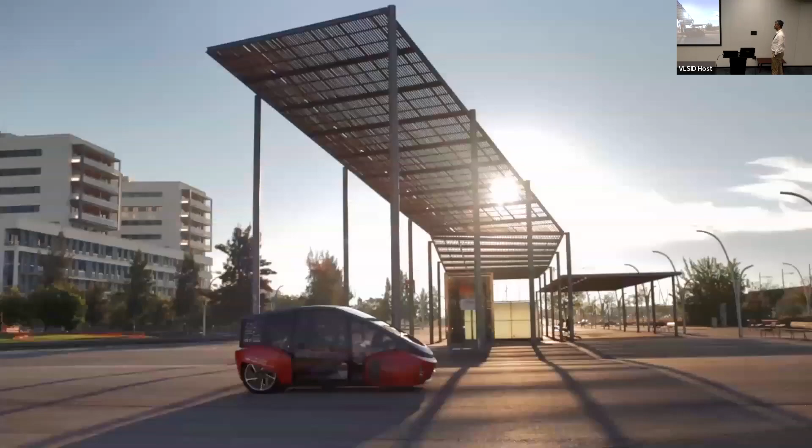So next 60, 70, 80 minutes, I'll try to introduce you to all the innovations happening around this whole autonomous vehicle and mobility era, and then Costas will deep dive into the radar part of it. Okay, so let's move forward.

I was strictly told by the technical program team of the conference that no marketing pitch, but I was strictly told by my corporates to brand NXP. Okay, great. So I'll take a midway. We'll quickly introduce a few thoughts about NXP.

1800s. Yes, 1886, if I'm not wrong. That's when this was patented, and this three-wheeler car went on a public drive. And here we are, 135, 136 years later. That's how the future cars are looking. I think you are trying to look for that big engine that is shrinking day by day. So as our technology is shrinking, so do our engines. And I'll show you this picture again towards the end of our discussion today.

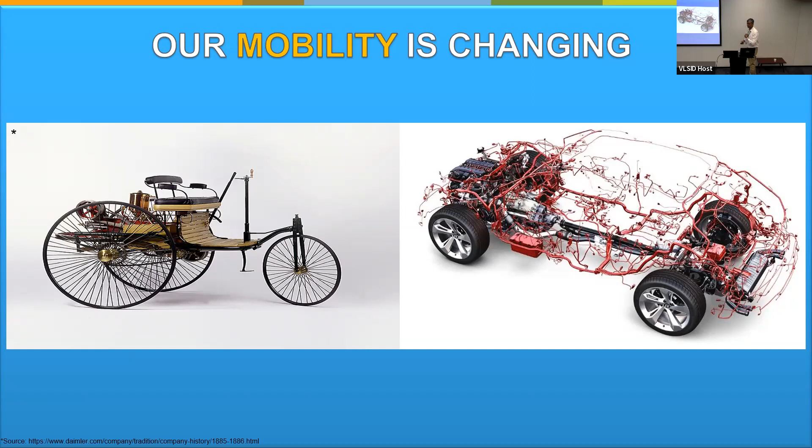And what is making this shift in automotive mobility? There are a lot of things here. I don't want to read through all of them, but have a look at the bottom here. The average vehicle today has about 1,000 semiconductors sitting inside it, and a bill of material of about $640. It's not that all 640 comes to NXP; it's shared by all of our ecosystem partners. But see the picture below: by 2030, which is just a couple of years ahead, we'll have about 1,200 semiconductors coming in, and about $1,000 per car is going to be spent only on semiconductors.

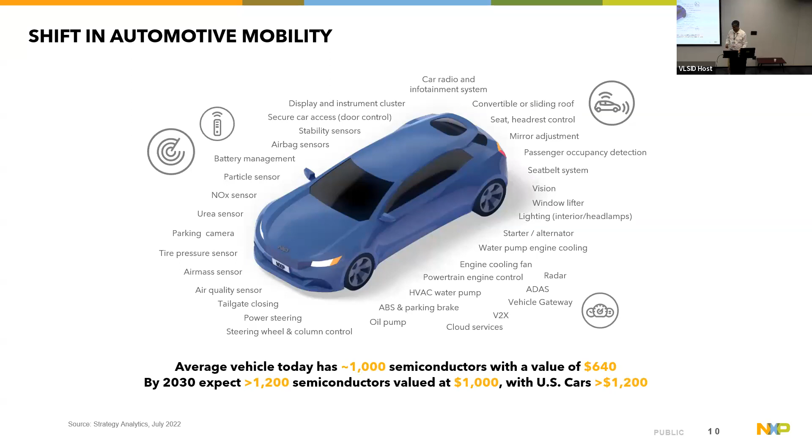And if we talk about the US scenario in particular, this number goes to 1,200 because the safety and security regulations are more, because in India everything goes. We manage things. We wait for that car accident to happen on the Mumbai-Pune highway to make the rear seat belt compulsory for us. But typically, this shows the level of semicon which gets into a typical car today, and that's why we'll focus from a business perspective on automotive.

Let's see the global mega trends in automotive. I have categorized them majorly in three parts. I'm sure there are 10 or 15 or 20 other aspects, but we are going to talk about these three in today's talk. We'll focus on autonomous, zero road accidents. 90% of accidents are due to human errors. Electrification: we really want to be zero emission.

Increasing global regulations. There are a lot of talks already being done across the globe on how to be carbon neutral by which year, and across India we even pledged some numbers. But how do we get that electrification? Because only the moment you take this whole carbon out can you reach these carbon zero numbers. The third thing we are going to focus on is connectivity. Zero time wasted. Intelligent transport systems, new opportunities for infotainment, powertrain, and whatnot. And within that connectivity, I'll leave the radar part to be covered by Costas.

Okay, so with this, let's focus on autonomy. And many of these things we discuss are not only applicable to a car. It could be autonomy for a robot. It could be autonomy of something you see day to day in your life, at your home or at your office or while you commute.

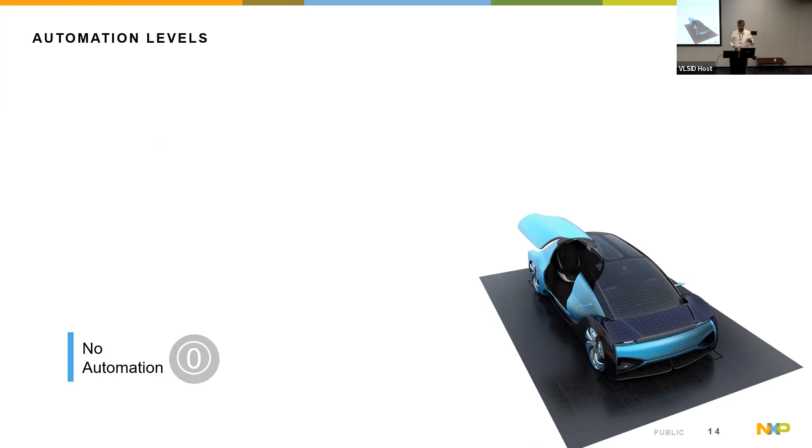So first is no automation: all mechanical, all done by a human, a smart fellow like you or me driving it. Excuse me. Thank you.

Next comes driver assisted. So there's an assistance system in place where longitudinal and lateral distances are assisted by that particular system for the driver. The next level is partial automation, where your automobile can get into autonomous mode, but if required, there is still a human sitting inside the car who can take control. So it's like the cruise modes we typically see in many of our vehicles these days in India.

Conditional is something wherein there's still a human sitting inside the car. The car is able to run on its own. But if there is a scenario being created which we assume is difficult to tackle in the given situation, it gives enough time for human intervention, the human sitting in the car, to take control of this and move forward.

Sorry for being ignorant about that side. Okay, I'm asked to stand here. I don't know who's watching on Zoom. I'm not that smart to be recorded. That's fine. You'll record audio.

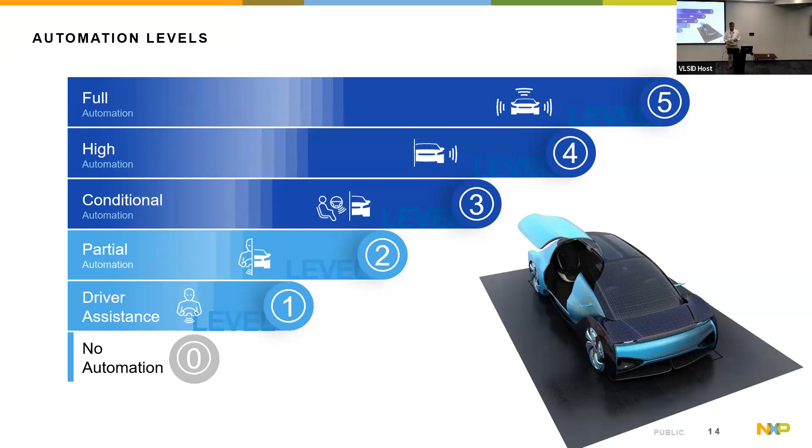Okay, no. So what I was trying to make out is, I feel there would probably be a McDonald's or KFC inside your car, because no one is going to drive. It's a way to commute. You go and buy things, and that's how they'll make money for all the battery or charging they are doing for the car. So that's how I see full automation changing our mobility once we have it on the roads. So levels 0 to 2 are human drivers; at levels 3 to 5 the automated driving system performs the entire dynamic driving task and monitors the whole environment.

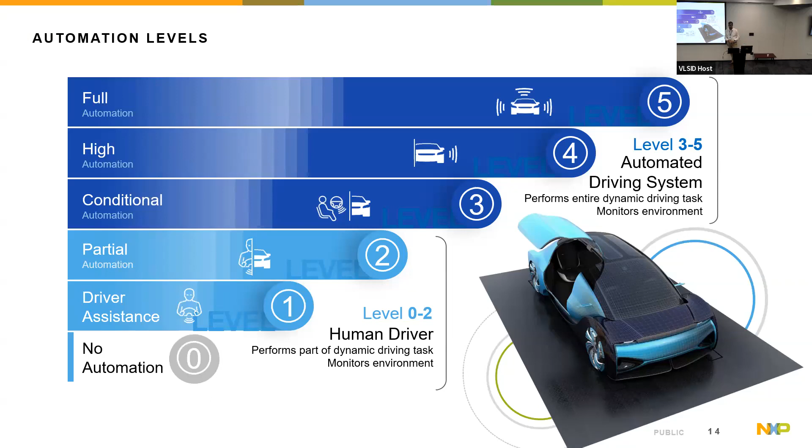I'll just touch upon the modeling and planning part of this automation, though there are n number of other concepts involved. Just want to give you a little glimpse. So modeling is something which gets monitored and modeled, and a mix of sensors and telematics takes care of this modeling part. There's a fusion architecture. There's not a single recipe. It's a sandwich architecture which we typically use in any of these modeling parts. Interoperability, or heterogeneous solutions.

Let's talk about one more typical Indian scenario. There's a big poly bag in the air. Now this autonomous vehicle needs to identify whether there's a human or not. If I hit that particular object, is that going to harm the car or the passenger sitting inside it, or it could be a bird. Okay, so we need to really understand, make the coordinates and see what it is and what it is not. Is there life or no life in that particular object.

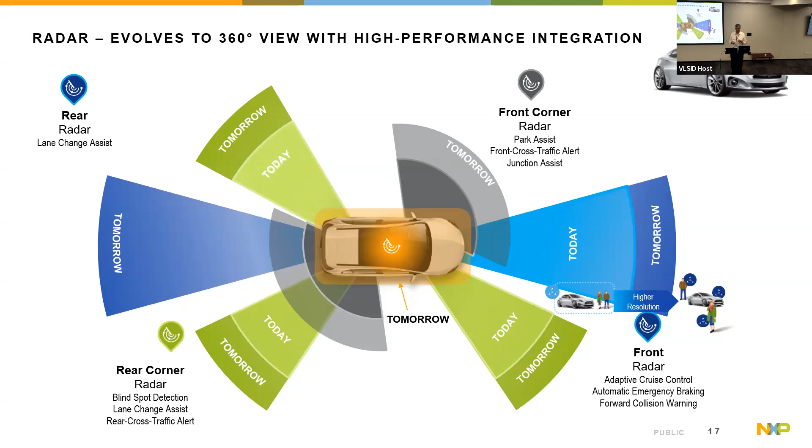With all these views, at every single roll of the wheel, you need to analyze your situation, what's happening or what could happen. As I was trying to explain to Costas, in India the bigger vehicle takes precedence. If a pedestrian is on the road and there's a bike coming in, the bike takes precedence. If there's a car coming up, the car takes precedence over the bike, and if there's a big tanker coming in, he's the king. So an autonomous vehicle needs to understand the shape of the vehicle coming in, and how to take the right decision at the right time. Quickly about vision.

This picture is trying to show a few of the views. If you see this particular car, it's not just focusing on the front view. If there are two vehicles adjacent to each other, you need to know what is on my left, at what speed it is coming, at what angle this guy is trying to tilt.

There are different driver monitors and perceptions we create, and this is how the whole automation thought process of decision making happens. We need to create a perception: I'm moving here, there's something on my left, there are two vehicles, some pedestrians going in and out. We need to see exactly where the object is, at what angle it's moving, and at what speed. If it keeps moving with the same angle, speed, and direction, will our vehicle collide with this other object or human or not.

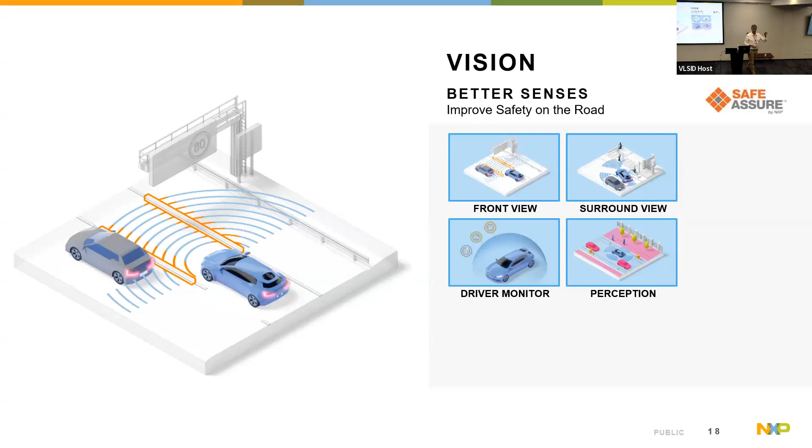And this all has to be done in real time. We don't get 3 hours to attempt the question, you need to take a decision.

Reasoning for today and tomorrow, there are many things which come into play, like surround view and vision for 3D segmentation, and we really want to keep extending it today, tomorrow, and probably in future we'll have a slide for a day after tomorrow, a week later, a month later, a year later, what all we can do. Certainly nobody today knows what we are going to do as an organization 10 years down the line.

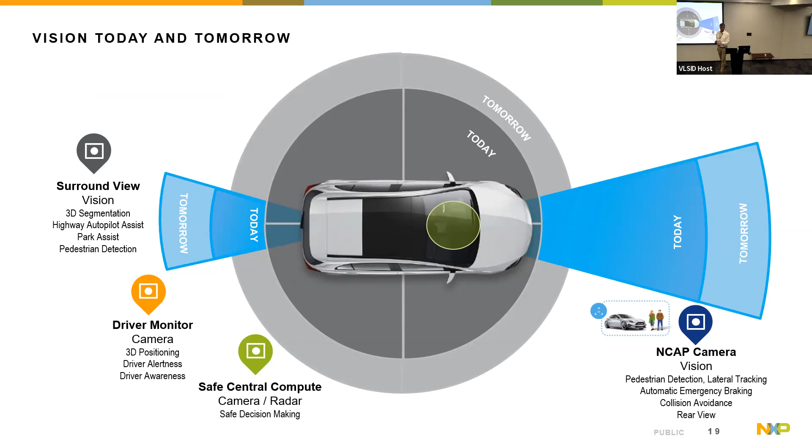Thanks for the question. Cameras and radar both, right? Why not just cameras? This is a really good question. So it's not only camera, it's not only radar, it's not only lidar. It is a mix of all.

Let's assume, so different solutions work for different segments, and different suppliers have different roles. Let me try to make you understand. We as NXP are doing something which is inside a tiny chip. We design the chip, and we have our own fabs to manufacture them, or we have partners who manufacture it.

Now this particular chip is sent to the next level of OEM, the original equipment manufacturer. This OEM could be, with all due respect to all the OEMs we work for, I'll give you a couple of names, though that doesn't mean these are the only OEMs we work for or the favorite ones of our organization or mine.

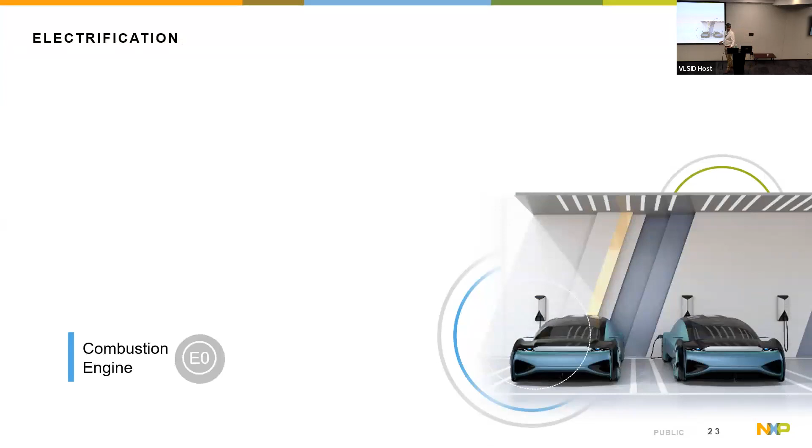But how do we achieve this? Because one of the major means of pollution is our whole mobility. This whole electrification has many segments. I'll start with typical combustion engines, which we have, I call it E0. The next one is mild hybrid. We have a lot of mild hybrid happening in India. Almost every other supplier is having a mild hybrid model these days.

Full hybrid, again, where your combustion engine is still inside your vehicle, but there are other means wherein you need not plug in to charge your batteries, but your battery gets charged with stop-break kind of systems.

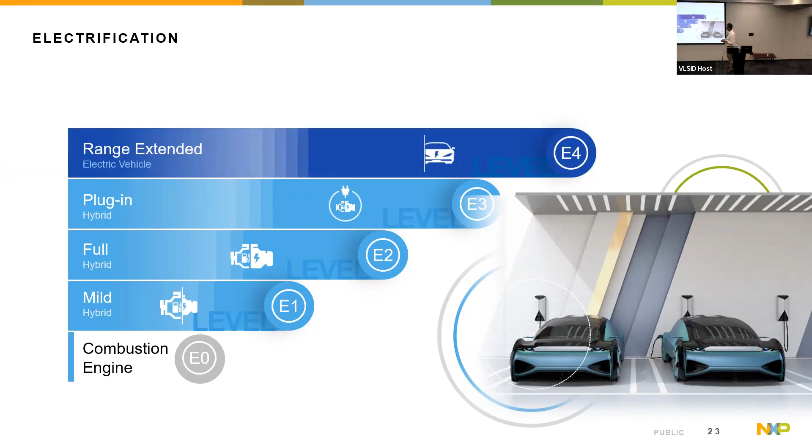E3 is something plug-in, wherein you need to plug in your vehicle to charge it, and you run fast. Range extended, E4 level of electric vehicle, where it's majorly the electric motor which is running all of your show. And the last is the pure electric, where I don't need a combustion engine, whereas combustion engine is already out.

This slide would probably tell you. But pure electric is the one where I say pure green mobility.

But I give this question to all the folks who talk about green mobility. We are solving one problem to create another, because we still don't know, with all the batteries we are trying to manufacture to power all these vehicles, how do we reuse or recycle those batteries? Because there's a famous big landfill next to the exit of the Delhi border, which has been shown in many movies, even Hollywood movies. So we are trying to create another such big, I would say, recycled e-waste generated from batteries.

But certainly carbon footprints are better. But how do we reuse? Because there are many other companies, I was talking to one of the startups recently, they are trying to optimize the battery life. They said, give me a dead battery and I'll still infuse some life in it.

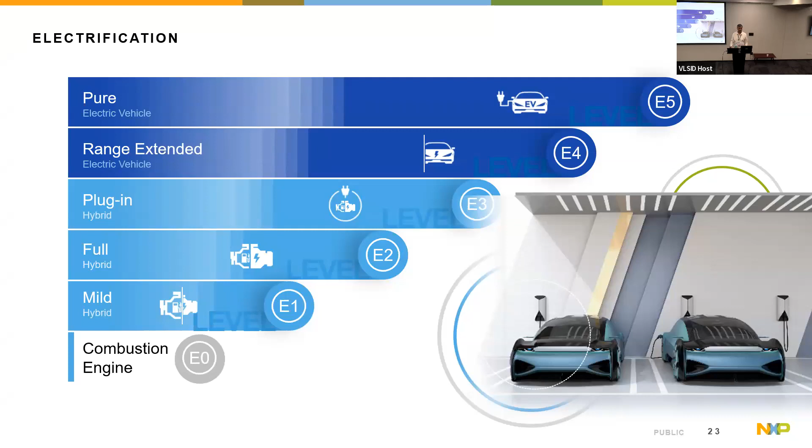So quickly, here are the different levels of electrification. If you see, once you get to this PHEV, we call it, it is something. So how do we say that we're becoming more green with electrification? Because the point is we are charging our batteries only, right?

Still, the power is still coming from some power stations, which may be running on coal. Which may be running on coal. It might not be running on coal. Okay, I'll come to this. Okay, thanks for giving me the answer. Okay, high percentage of certainly.

If you see the combustion engine, certainly the whole lot of pollution which is being generated as compared to electric vehicle is more. But certainly to get that electricity, how do we produce it? Is it coming from a nuclear plant, which is hardly doing any kind of effect over environment typically, or is it coming from a coal-related thing, or through water you're generating electricity, that's a separate part. But as I said, we are solving one problem and creating another, and that's how we keep on evolving.

But the moment you call it green mobility, it is a mobility in which the final product, a car or vehicle, is not polluting your environment. But now you will say that you're generating plastic and metals to manufacture the car, and that's polluting. Certainly, yes. But the end product is not generating pollution for you.

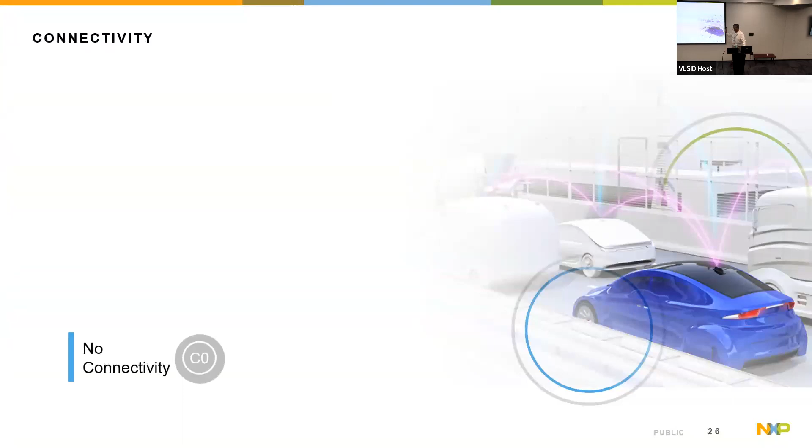Let me jump on connectivity, where I really want to spend a little more time. So like electrification and autonomous, there's a different level of connectivity we call it. First is no connectivity, our typical Fiat car, you have one parked in your Chowmahalla Palace. I went there, so they still had a Fiat there parked in a green color.

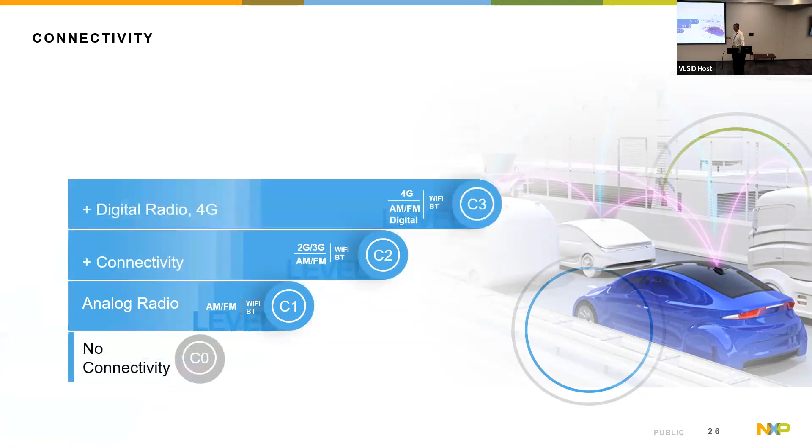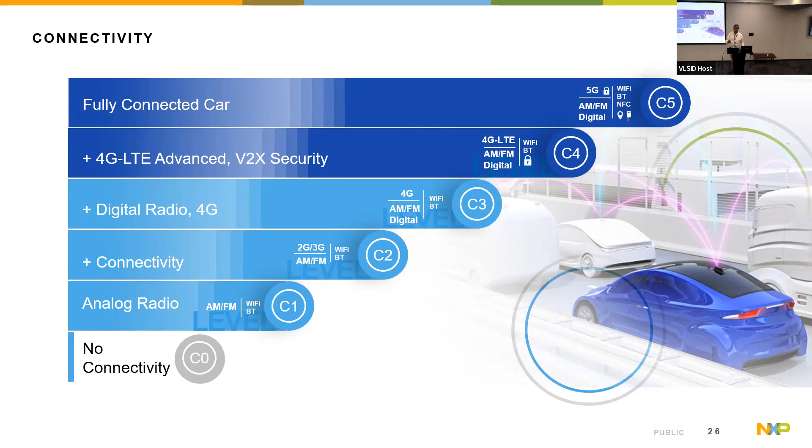And then some analog radio, more connectivity with 2G, 3G, amplitude modulation, frequency modulation. Digital radio, 4G, we already have 5G in India. Then the next level of connectivity with LTE advanced, etc. And finally, a fully connected car, which can talk to different devices or different other infrastructure or different other vehicles. I'll talk about the different connectivities in a few of the next slides.

I'll try to wrap in 10 minutes, and then we'll conclude. We'll spend the next 10 minutes about the future car infrastructure.

So here I just want to give some glimpse about V2X, as she asked. There are many means for this vehicle to interact with infrastructure. Similarly, there are modems - 4G, 5G, and now we're already talking about 6G connectivity. Broadcast reception, analog radio, digital radio, satellite radio, and we're talking software defined radios.

But when we talk about radio, this always reminds me of the example of a Jeep being hacked many years back. How that car was hacked, I'm sure many of you must be knowing, but for the other audience who might not be, this hacker got into the car through a radio channel. Because we never secure our AM, FM radios - there's no banking password residing inside that radio. But through this radio channel, they were able to get control of the whole vehicle.

Similarly, back in 2013, there were many spam mails being generated. One of the agencies took over and said, okay, let's see from where this was getting generated. This was getting generated from a house. So, as we have biased minds, we'll think probably this was happening from some laptop, but that was happening through a refrigerator.

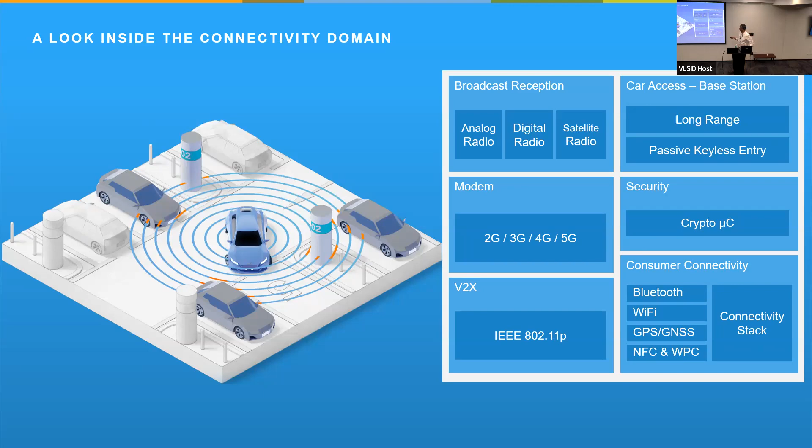I need to run fast to cover those topics. I quickly want to talk about UWB, ultra wideband, getting a lot of traction as an organization. It is accurate positioning of information of objects in real time. The next slide would tell you how precise it could be.

So this is one of the solutions getting a lot of traction. I've seen a few groups and even startups working on solutions around it. And this is not only applicable to autonomous vehicles - keyless entry is one application, but this can be used in many other applications within your home, within your workspace, etc.

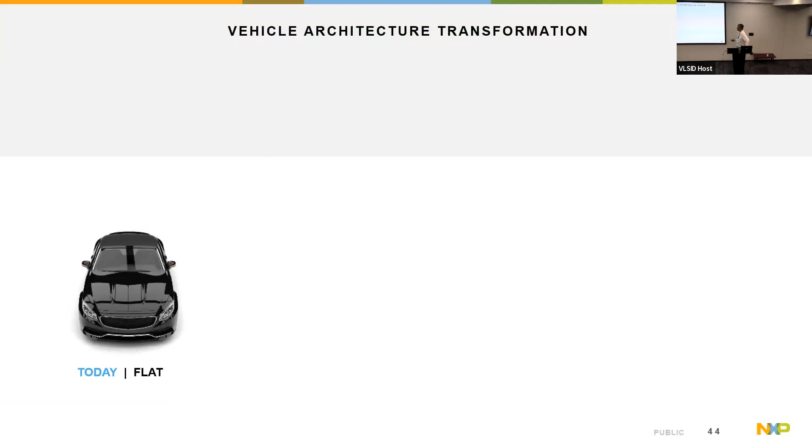So let's talk about the architecture of a car for the future. I really wanted to spend some time on this. So if you see the typical vehicle architecture, how that's transforming. This is today. Don't read it Fiat. It is flat. So today's architecture is typically flat. A flat architecture is something which is all across, which doesn't have multiple layers of computing or processing available.

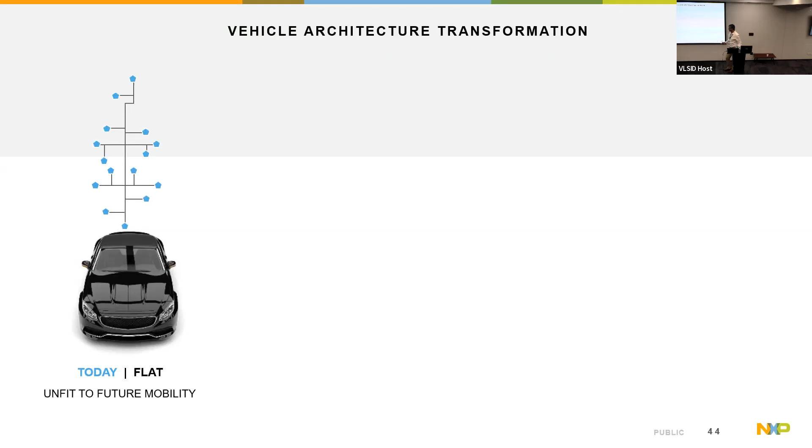So it's unfit to future mobility, which not only we but everyone is talking about, but how we perceive it is a logical restructuring. So the car is now getting smarter. The typical definition of a smart device in layman's language, I would say, the moment you have connectivity, it becomes smart.

So your typical keypad phones, the 3310, if you can recall the snake game, the moment they got connectivity through all these apps, sensors, etc., they became smartphones. Similarly, your television became a smart television, your oven became a smart oven, your fridge became a smart fridge, and similarly, a car became a smart car.

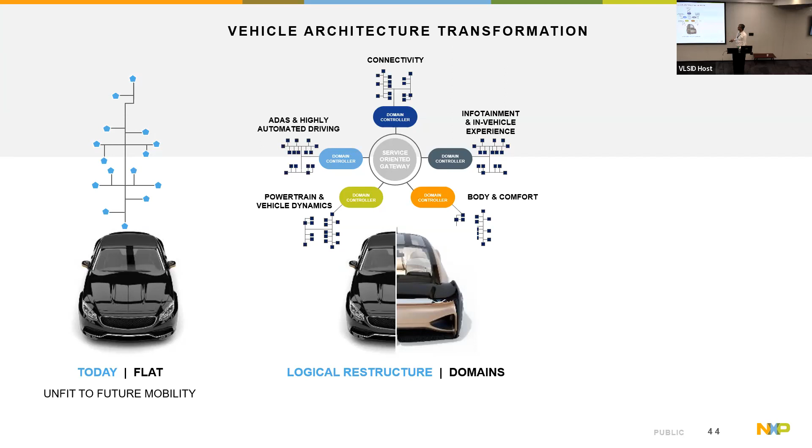So here we talk about different domains. I don't know how well you can read it. So this is a domain controller, another domain controller, the next domain controller, and there are different domains. The car is being segmented, with service-oriented gateways connected for all of these domains. As we move forward, there's one domain for connectivity, one for entertainment, one for body comfort, powertrain, ADAS, etc. But how we foresee it is a physical restructuring, creating different zones.

So this is how we foresee future cars would probably look. There'll be different zonal gateways sitting in the car, and then there's a central brain or processing unit which is talking to all these zonal gateways and taking a final decision.

So from flat architecture, we first created different domains. There was a controller for each of the domains, but now I want to bring in a powerhouse here. But now the question comes up: the powerhouse has to be a really strong compute system which can speak to all these in real time. Does the compute go back to these to take a corrective action? And in a fraction of a second, before you blink your eye, the action should take place.

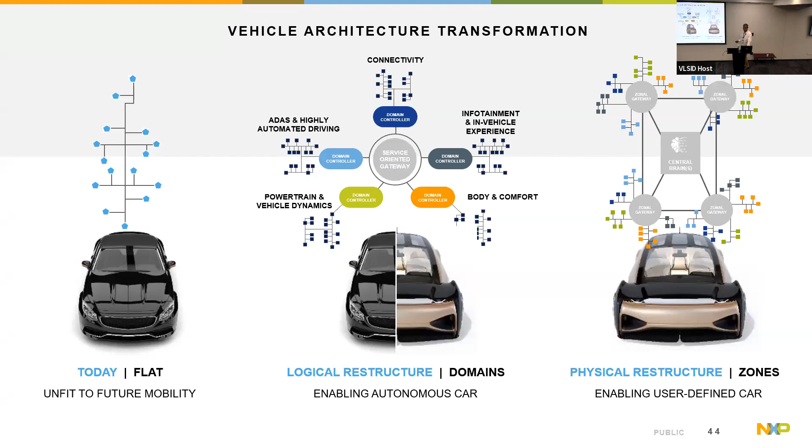Let me skip, because I don't want to talk more about domains. We already talked about the zonal thing here. So, different sensors in automotive, as you might have seen in the initial slide, are all across your car. It is not only a segment or single feature which needs to be controlled.

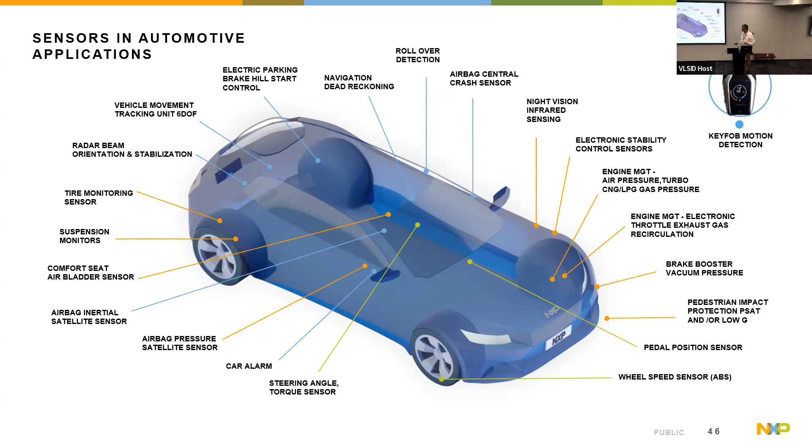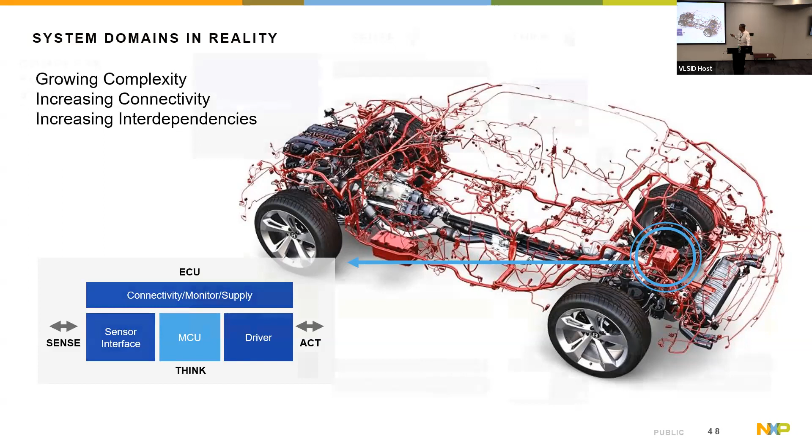Well, I don't call it a marketing slide. This is one of our product families which has all these solutions coming in. If you recall the slide where we talked about the three-wheeler to automation, here the whole magic is sitting inside this red box. And I have one slide, probably the following one or the next, which makes a comparison with the traditional car, how the whole wiring is going on, and you'll see some amazing features. This is a very good detailed slide.

It might take hours and days to explain it, but let me try to cover it in a couple of minutes. So within connectivity, there are different areas. At NXP, we segment these things into sense, think, and act. If you look at sensing, it could be through connectivity. It could be V2V, V2X, or it could be through cellular or Wi-Fi.

When we say BT, it is Bluetooth. There's Bluetooth Low Energy. Then NFC is near field communication, ultra-wideband, smart car access, radio access. Within ADAS, there are cameras, lidar, radar, and to answer your question, probably Kostas will cover details in radar. Coming to powertrain, vehicle dynamics: motion, pressure, speed, ultrasonic; body and comfort: temperature, light, humidity, switch panels.

Huge innovation is going on in the lighting domain itself now. Inside the vehicle, you might have seen those small LEDs all together, and their life is long. LEDs last a long time, and they are very low power. Most of the time we are now replacing those yellow bulbs. I don't know whether your generation has seen that, to CFLs and now to LEDs.

Someone asked me this question. He was a PhD scholar in one of the forums, and he said that typically it is said that LED has a huge life, but in my home, the LED bulb is hardly lasting for a year or two. My personal perception is that the LED has that good life, but the controller is what is malfunctioning. So that is one of the areas lighting guys are focusing on, the controller which controls the LED.

Sense, think, connect, and act. The sense part: radar, V2X. The think part: the integrated, uniform platform using connectivity, UWB, and electrification. What I wanted to talk about is that whatever solution you are developing today should be scalable. You don't want to bring your car physically back to a workshop to scale it to the latest offerings.

Someone asked me a question about software. There's a huge focus on software now, not only within an organization but in the industry. Earlier, chip suppliers gave only the hardware chip, and the OEM used to get someone else to make a software solution around it, and it was very difficult.

I'm trying to soften this example. It's like your wife has cooked a recipe and you're now trying to serve it well. At least I'm very bad in the kitchen. I can't do the due diligence.

It's a solution coming from one party, and another is understanding the solution and developing software around it. That is shifting in the industry now: all the hardware guys want to have their own software. They want to sell a package solution, not only a chip but the whole platform, to the OEMs.

So the software should be scalable and expandable. For secure connection for a smarter world, which has evolved at NXP, we strongly believe in that, with cloud infrastructure and enabling technologies and edge-to-edge connectivity, be it a home gateway or automotive gateway or a smart city or a smart health monitor, etc. These are the segments which we touched on. It's not only the automotive; it is industrial IoT or mobile or communication infrastructures.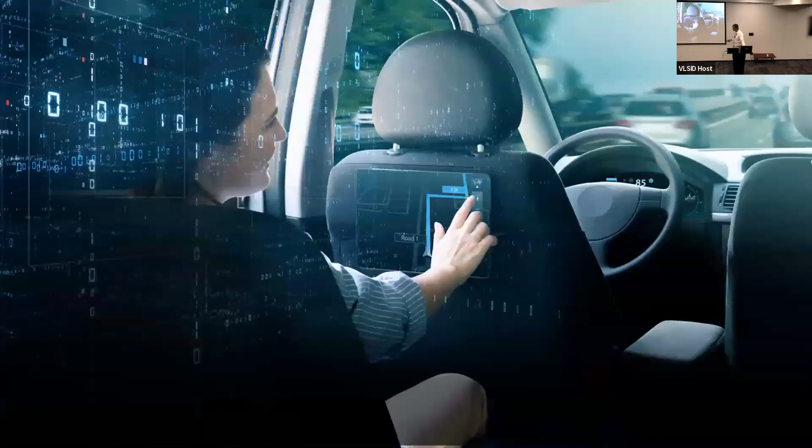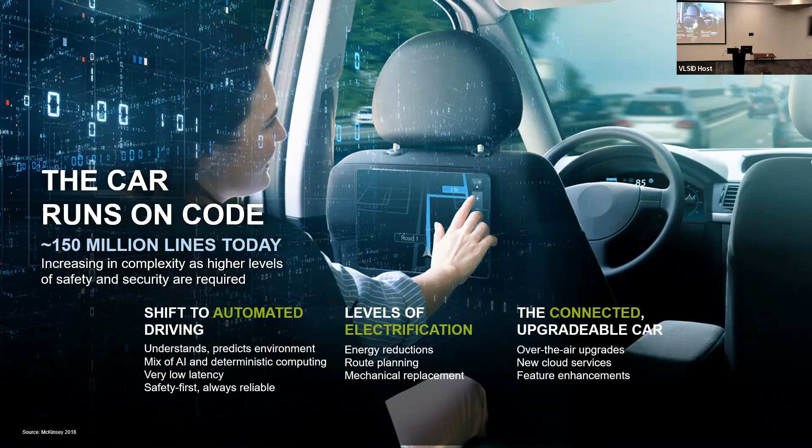Levels of electrification. We really want energy reduction, route planning, which again helps in reducing, and then mechanical replacements. The connected upgradable car, the whole look and feel should be upgradable. It's not something which I bought today and I'm going to live with for the next 10 years. The infotainment can be wholly restructured.

Future of automotive mobility. I'll play this quick quiz for you. So let's assume you are residing in a high rise. Where is your nameplate or number plate? It's at the entrance of your house today. Where do you think this would move in future?

Any guesses? Come on, quickly. I need to conclude in the next 1 minute. I'm 4 minutes overdue already.

My question is, if you're residing inside a flat, at the entrance you have your nameplate written there. Someone would identify it with that house number, 318 or whatever it is, the third floor, 18th house. Okay, where do you think that nameplate would go in future? Cloud. Okay. So let me quickly run through.

So if you want such kinds of autonomous vehicles to deliver stuff to you, those would land in your balconies now. So you will have an RF tag in your balcony. Using that RF tag, this guy would get to know, okay, this is my destination to place your hot pizzas or medication or groceries or whatnot.

What if I don't have one? Sorry? What if I don't have a balcony? There are some things going on in smart homes. They'll have delivery windows, wherein the drone would come in. It will identify this is a window I need to deliver in. There will be a secure connection, secure communication established between the drone and the window. The window would open. Based on the size of the packet, the window would expand, and the drone would deliver it and move off.

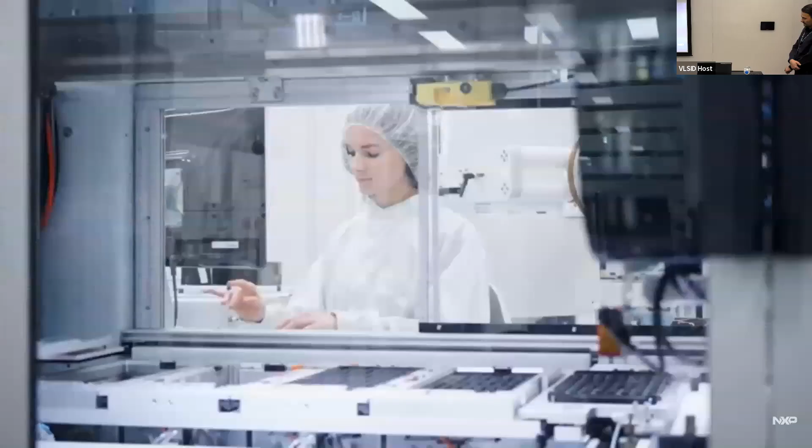Imaging radar is important today because it's a new key technology for building safer cars. It allows the vehicle to travel in conditions where lighting is poor or the driver has a hard time seeing, so hard rain, light rain, fog. Cases where the driver can't see well, the radar can still see, and from that make the safest driving decisions possible. Autonomous vehicles are definitely in our future, and they will become the norm when they become extremely safe. We need sensors to continue to mature, and one of the key sensors is imaging radar.

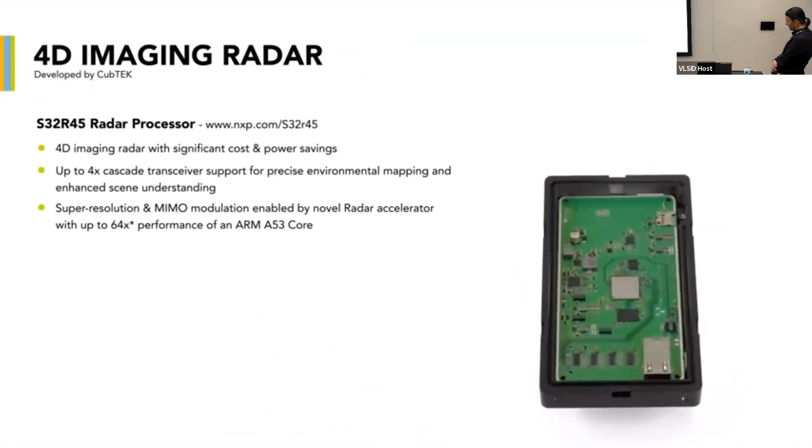Hi, I'm Robert Carter, Field Applications Engineer for NXP Semiconductors. Today I would like to introduce you to a new imaging radar sensor that we have mounted to our vehicle. This sensor is powered by an NXP radar chipset, and it's developed by our partner CubTEK. Our chipset consists of an S32R45 radar processor and the industry's first dedicated 16 nanometer imaging radar processor. These processors deliver unparalleled computation power for highly efficient real-time data processing at low power dissipation. To provide data for the digital signal processor, there are 4 cascaded RF CMOS TEF82xx radar transceivers. These transceivers provide 2 times RF performance improvement for enhanced sensing.

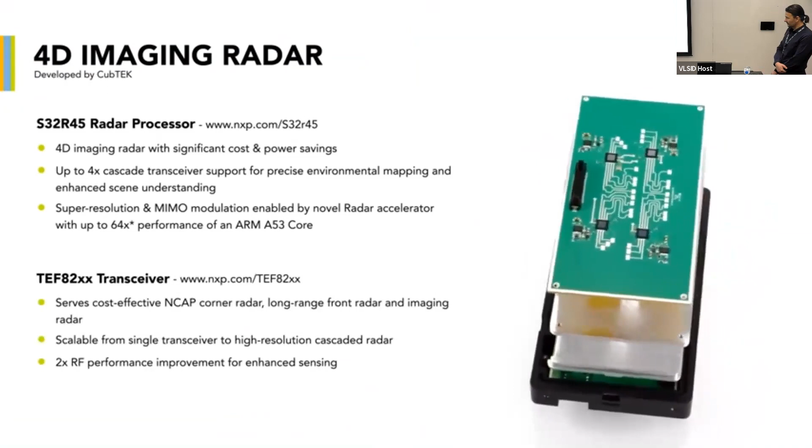4D imaging radar refers to a radar that measures 4 key parameters of objects that the radar can see in its field of view. The first one is range, or distance between the radar and the object. The sensor in our case is actually detecting short range and long range simultaneously. This capability is due to a sophisticated antenna working with the hardware acceleration on our processor, which provides the processing power to process different modes simultaneously. One of the next things that is measured is the velocity or speed of the object. The radar can determine the difference in velocity between the vehicle and the object. This information is critical, for example, when executing automatic emergency braking, performing adaptive cruise control, or for making safe driving decisions associated with route planning.

Another key parameter that is measured is azimuth angle. This measurement describes how far to the right or to the left a detected object lies from the center line of the radar. When multiple objects are in close proximity to one another, imaging radar provides sub 1 degree azimuth resolution so that these objects can be separated from one another. The final dimension is elevation angle. This is a measurement which allows the radar to calculate the height of an object above the road surface. The radar can determine if objects it detects are safe to travel over or if they need to be avoided. One key use case for this parameter involves detecting an overpass or bridge structure over the roadway while at the same time detecting if the roadway beneath the structure is clear for safe travel. All four dimensions taken together allow the radar to expertly map the scene in front of it. This information can then be used to alert the driver so safe driving decisions can be made.

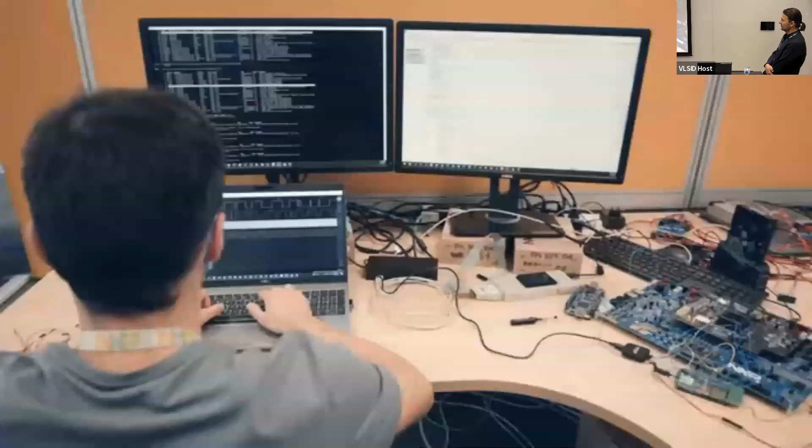Today, NXP has a leading position in automotive radar. Through our continuous innovation in millimeter wave design, radar signal processing, and advanced algorithms, we will continue to develop products that will keep us in an industry-leading position for years to come.

That's, let's call it, a visual aspect of what an imaging radar is. So we're going to now build up step by step all of the understanding of how we get there, from the basic principles to the most advanced implementation.

Let me just get back to the presentation. Okay.

So, quick recap on the problem statement. It is a fact that more than 90% of the accidents today take place because of an issue related to a human error. And that has a devastating impact, not only in terms of financial aspects, that you have to pay insurances and all that stuff, but it has a human aspect, and it has also many other implications: even if there are no fatalities, congestion, CO2 emissions, things getting slow. So an economical factor, but as well as a human factor. And that's basically the problem that the industry is trying to address, how to take the human factor out of the equation.

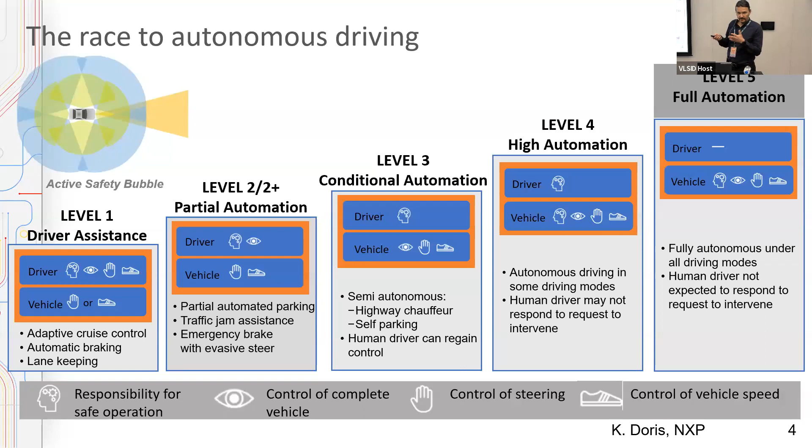Now, when we say we need electronics and we need sensors, we didn't yet talk about which sensor. I'm advocating radar, but the story is a bit more complex. In fact, you need at least 3 sensor modalities: here, a camera, a LiDAR, and a radar. The reason is that no sensor technology is perfect, and equally economical. Different sensors operating at different physical wavelengths operate in a different way, and they give you different benefits. For example, with a camera, ranging is a difficult thing. You cannot detect something moving in your direction, you cannot even detect the distance.

If you move to LiDAR, you're on the other extreme. Ranging is extremely precise, millimeter, because you really use optical wavelengths, and radar is somewhere in between. If you change and say, okay, now I have adverse light conditions or weather, the camera is limited, LiDAR is impeded. This is where millimeter wave technology is shining. But if you want to get colors, the story inverses. So the solution in the industry to get this picture completed means you need redundancy. You need to have failure modes. You need to have control points. Therefore, you need to have all of this.

Now, we're not going to be discussing LiDAR. It's another chapter. The main thing to remember there is that there is a zoo of options, of technology concepts, all of them offering the ability to go down to something like a sub-$100 device. That would be the big thing today. You can see some of the big LiDAR systems that Google cars and others are using, with these big spinning things on the top. And they cost $1,000, maybe more than that. So that's something the industry needs to break down. But we'll leave that apart and really focus on radar technology.

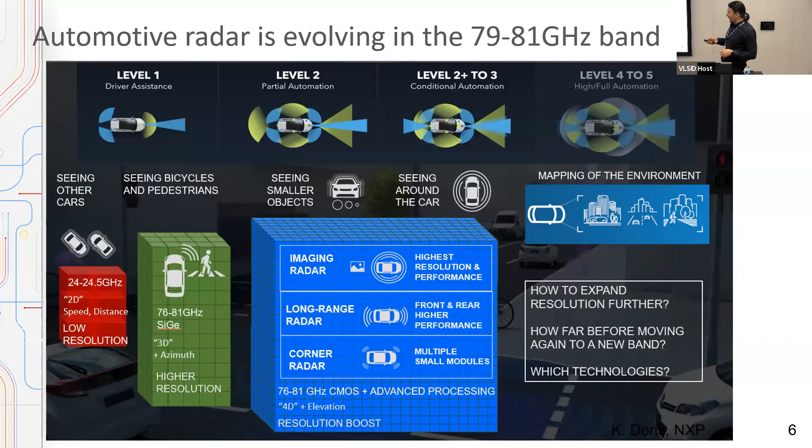So there's a continuous evolution here. We went from 24 to 79, and there will be more steps in the future that you will see at the end, that is being cooked - maybe moving to 140 gigahertz and so on. So an evolving landscape - how to do all that increase in resolution?

First, let's look at the type of radars and their requirements. You see different code names, and there's a range for a given radar function, and also field of view. If you wanted automatic emergency braking, you need a very long distance to detect, but a narrow field of view. If you want cruise control, you still need a field of view that's large. So all over the place, different radars, different types of applications.

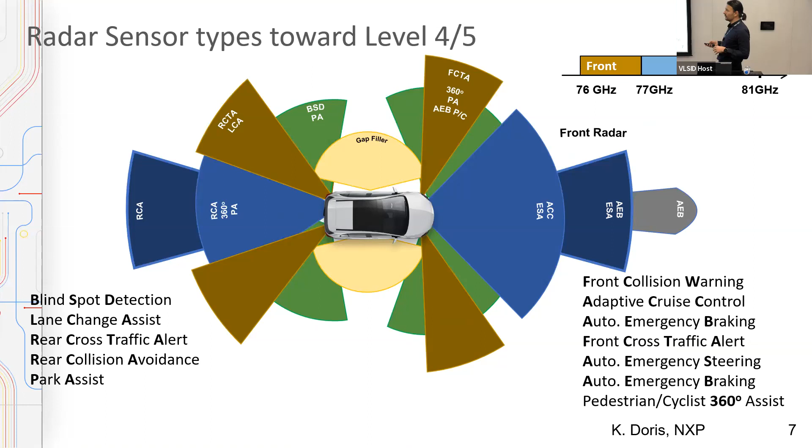You cannot afford having a totally tailored device for each of these - they're devices that cost a lot of effort to make. So you need a scalable approach. As shown in the presentation, we need 4D performance: azimuth, elevation, range, and Doppler - so velocity. Flexible field of view - you need to go long range and narrow, then suddenly change to wide field of view. You need to track many objects.

Resolution - sub 1 degree is not something easily done in radar, as you will see later on why. Imagine you have two cars at 250 meters, 4 meters apart - already to detect these two, you need 1 degree of resolution. So that's not an unrealistic number.

Apart from the size and the cost, there is a major point coming up: interference suppression. You sell so many radars that everybody has them, and you have like 10, 15, 20 radars on your car, so in a traffic jam everybody's blinded. One might say, if I'm in a traffic jam, who cares? But that's not always the case. You also have high-speed scenarios, a motorcycle crossing by, a lot of situations. So interference from radar to radar is an important element coming in the industry, and things have to be done to address that.

Connect the sensors. All of these radars need to be connected in a car, in a central processor or in a zonal architecture, and scalable. That is, you make one design and utilize it for a platform.

Of course, you have all this attenuation, scattering, phase change, thermal noise - all those physical effects happening in the field. Let's put them aside for now and think of the main principle: you just need to detect the distance.

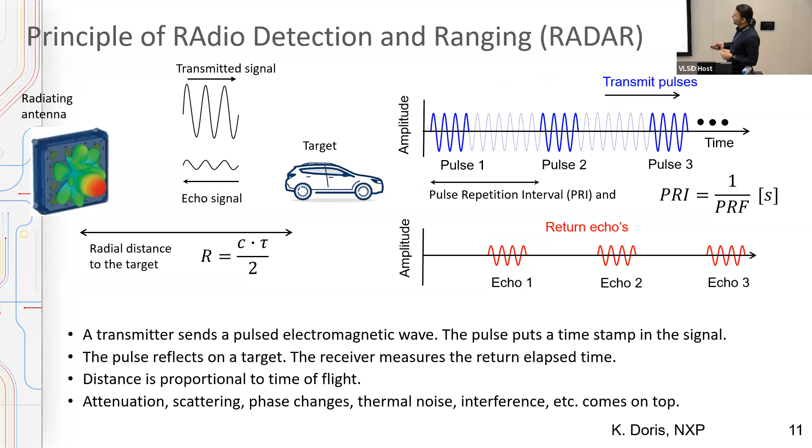Now, if I have a pulse that falls on top of another, it is non-resolvable. That creates a range ambiguity also. So I have a transmit pulse, and it gives me an echo far away. I'm now transmitting a second pulse. Who can tell me if this return pulse is coming from the second transmit or the first transmit? That's the second problem: ambiguity.

The other problem is that my pulse duration is what counts for resolution, so let's make some calculations. I want a narrow pulse to increase resolution. I need a 1 nanosecond pulse for 0.15 meters of resolution. That's not practical, you'd need nearly megawatts in this narrow pulse to get a distant range of 200 meters. So that approach is conceptually okay, but practically not okay.

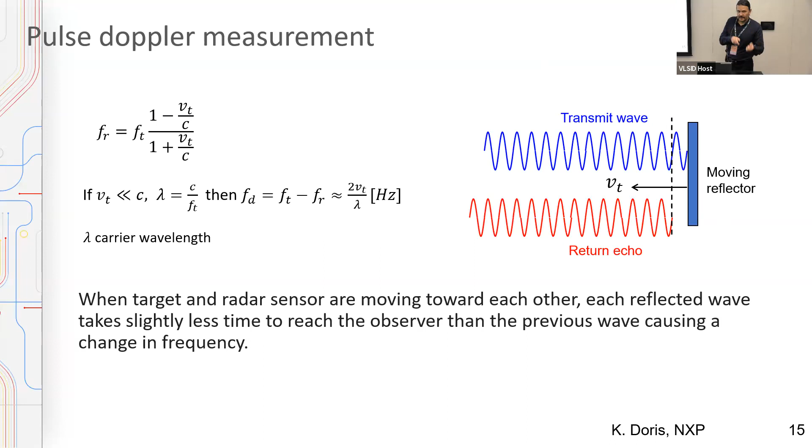Now think about it. If I have a moving object that actually gets a signal, a wave reflected, when I receive it, I will see a continuously moving phase. So instead of trying to measure frequency, we'll find a way to measure the continuously changing phase, and from that deduct the velocity. So how this is done is like this.

Blue, transmit pulses, red, received echoes. I'm just rewriting the phase, putting in the factor of distance changing as a function of the object velocity. If you simply keep the velocity of the object, you'll actually see that practically the factor 2v of the object divided by the wavelength, this is the Doppler frequency. So practically by measuring the phase, I can deduct the vector, the velocity of the object, the Doppler velocity.

Because this is changing. Imagine that if I move an object lambda over 4, just move it lambda over 4, I get a change in phase of pi. I'm Greek, so I'm calling it always p.

So that means if this thing is moving, the phase keeps oscillating up and down, up and down. So I keep measuring the phase in slow time, pulse after pulse. And if I measure the phase, I'm sampling. There's this kind of sampling theory behind it. If I sample it with a proper refresh rate, which is determined by this pulse to pulse interval, I simply can find out what the velocity is.

So the shorter the pulses, the higher is the velocity I can measure. But the longer the interval is what I need to get the resolution of that velocity accurate enough. So I need very long intervals to get very good velocity resolution, and I need very fast repetition in order to get large velocities. Think about 400 kilometers per hour. If you're on a German highway with 200 kilometers per hour this way and 200 kilometers per hour on the other side, well, they are in different lanes and separated, fine, but still. That's the type of relative velocities we're talking about.

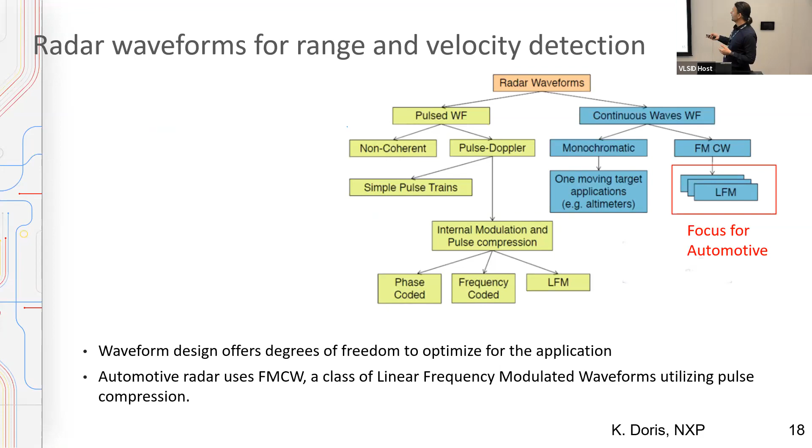We will focus on automotive waveforms, and automotive waveforms use a subclass that are called linear frequency modulated waveforms. This is where we focus, and they have some attractive properties that actually translate to implementation as well as to real radar performance indicators, such as ranging and velocity detection. So let's now zoom into these waveforms.

The beauty of that is that you now have two aspects. On one hand, you have the duration of the pulse. It starts from here, it ends here, which determines your energy of radiation. But you also have the frequency of the pulse changing, which determines your resolution. So you have practically decoupled range resolution from distance, that is, how far you go.

Now let's move to the FMCW stretch processing principle. So on the left, you see a typical FMCW radar architecture. I have my fractional-N PLL. It generates the chirp, this curve over here. Typically, this is done at, say, 10 gigahertz, and you upconvert it to 80 with a multiplier. Then you transmit it.

It's an IQ modulator in this case. You do some phase control for other things that I will explain later. But the same signal you use for demodulation. So you hit a target, it comes back, and you demodulate it with the same signal. And now let's see what that means. So I have my transmit signal, and I get my echo.

At a given moment in time, when I demodulate it in this down-converting mixer, I see the difference. That's what the mixer does. So practically, I translate this RF or millimeter wave signal into a baseband signal. This is close to 80 gigahertz, this is close to 80 gigahertz, this is close to 10 megahertz. And this oscillating signal is the footprint of one target, oscillating at a fixed frequency.

Now that's fantastic, because now what I've done is I have connected the time of flight, which is this delay, with the chirp bandwidth and the chirp duration. So the ratio of the chirp bandwidth to the chirp duration times the time of flight gives me the beat. So I can now measure this oscillating signal with an A to D converter, and I have the distance.

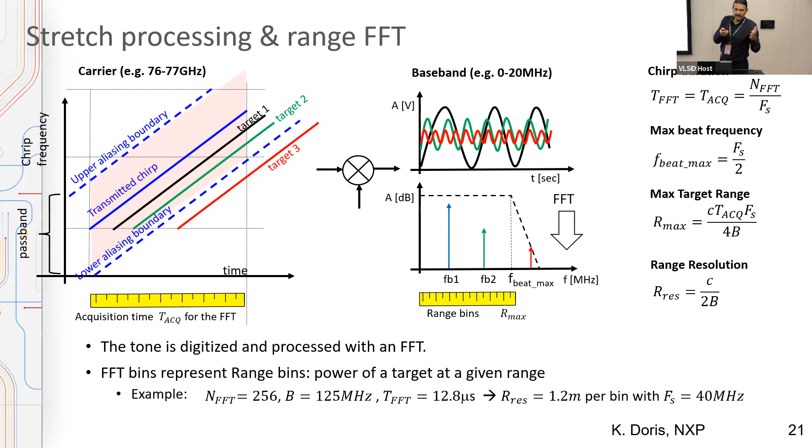The signal I have remaining, I just create an FFT on it. And basically I have my radar detection. All of the information I have is on the FFT, the amplitude, the phase, and so on. So that's the stretching property of the FMCW signals, and that's why it is so power efficient, because you translate a problem from 80 gigahertz to a problem that is on megahertz, 10 megahertz. And then you do basic FFT, high pass filter, low pass filter, and you're done.

Now, you can do that in an automotive application like radar. You have a frame rate, typically 40 milliseconds. This is safety, meaning that every 40 milliseconds, you have to refresh your image of the environment. So you have, roughly speaking, 20 milliseconds for acquiring data, 20 milliseconds number crunching to get your data out. You could have a single signal, a chirp, going for 20 milliseconds. And you can actually do some basic functions there.

But in automotive, we're not using this. I'm using many small pulses. Small meaning, instead of having a 20 millisecond pulse, I'm using a 20 microsecond pulse, but many of them, because that gives me redundancy. It allows me also to decorrelate low frequency noise aspects from high frequency noise aspects. So we'll be talking about the fast chirp principle. It means it's a chirp, yes, but it's fast, meaning it's microseconds, not milliseconds. That's the fast chirp.

Now, with that in mind, we're going to see what happens after the ADC. So first of all, we detect range. So here I have the FFT bins for a given chirp. This is the second chirp. This is the third chirp, and so on and so forth. I can plot the FFT data here. You see here radial distance, but actually it's the FFT step. A range bin is a range step, right?

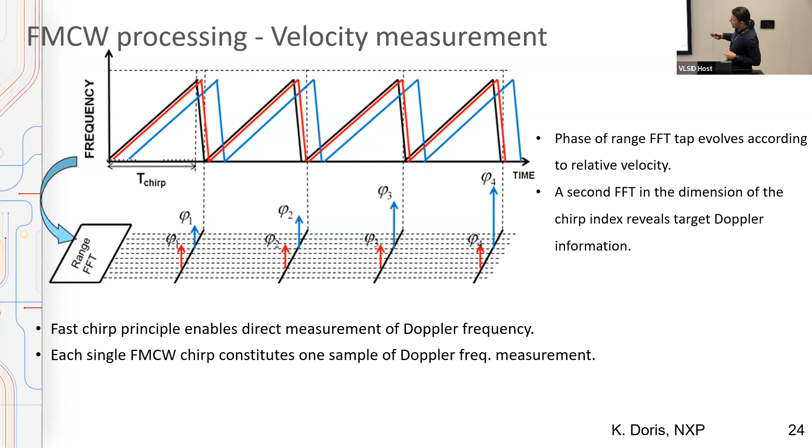Now let's go to the next step. I do the Doppler processing. So remember that I get my pulses and I want to detect the phase, and the phase is oscillating because the object is moving. So I make a second FFT. The second FFT operates across, let's say, the slow time. So you see the same chirp here, the same object; because it's moving, it has an oscillating phase. So the second FFT, I do it across the same range bin, but on different pulses. So first FFT horizontally, second FFT vertically.

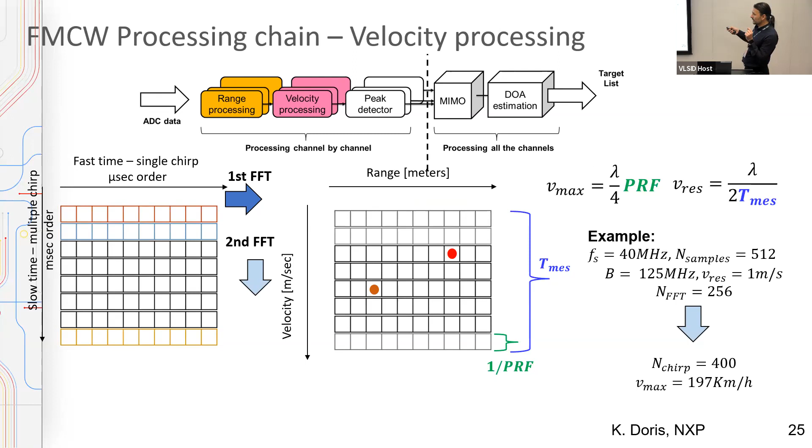When I do so, I suddenly realize I have a second target. Interesting, because doing the FFT twice means also a second benefit of SNR. That's a further means to detect signal because it lowers the noise even further. And of course, there are some formulas, I'm not going to explain them, but the principle is maximum velocity requires a high pulse repetition rate, and velocity resolution requires a long measurement time. This is a trade-off. And now visually you can see that in the first FFT, the second target is missing, but by the benefit of the second FFT, I can detect also the second target.

The next thing is we need to put a slicer, a limit. We say, look, everything above 10 dB SNR is a target that needs inspection. So then I define a layer where we say, look, this is my threshold, and often that threshold is automatically adjusted with what they call a constant false alarm rate. I'm not going to get into the details, it's a topic in itself. In the end, what you need to understand is that we have false alarms and we have reliable detections, and there is an optimum between the two.

So once this is detected, then basically you can have a sort of two-dimensional map where you have the range and the velocity, and each dot represents a target with a given range and a given velocity. I mentioned before that we need, roughly speaking, 25 Hertz, 40 milliseconds for a complete frame. And that's 50% available to collect data, time and frequency, and 50% to let the front end cool down because this is really getting very hot. And in the meantime, the processor gets the data, measures them and gives us target lists.

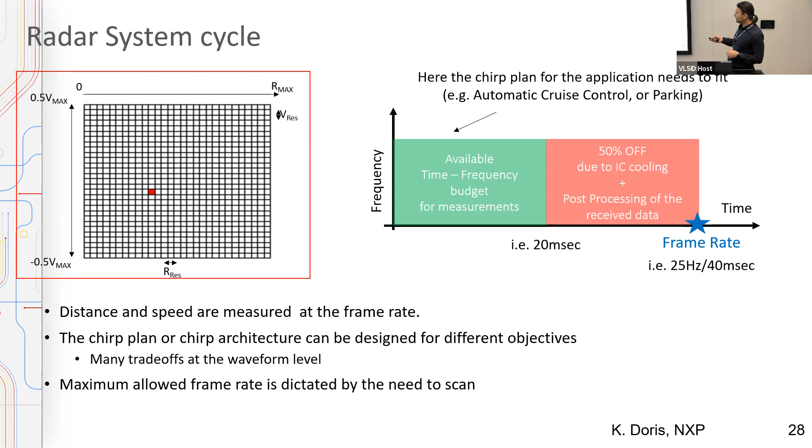Okay, so far we talked about range and velocity, but there is more. And that more is the angular resolution. So imagine I have a transmitting signal coming from a car here and two cars at, say, 250 meters at 4 meters distance, moving with the same velocity. There is no way you can tell if it is one or the other car by simply the range and velocity, because a radar measures radial velocity. So you need angular information, and the only way to obtain it is to use multiple transmitters and receivers to create an array and beamforming techniques.

Typical definition of angular resolution is the capability that a radar has to distinguish two targets. Usually you count the peak of the lobe of the beam you're creating at the 3 dB point, and then that distance defines your resolution in the angular domain. Basic phased array type of analysis will tell you that I need a large number of antenna elements. Imagine one transmitter, multiple receivers. If you want to get 1 degree of resolution, you need roughly more than 128 elements. That's a lot of elements. That's multiple watts of power dissipation. It's not straightforward to do that. So we need a better technique to simplify that problem.

So what's the principle, first of all? So here is my transmitter from a car far away. Let's assume I have a linear array, one transmitter element here, multiple receiver elements at a given distance. So this is called a linear antenna array. If you assume you're in far field, so your plane wave is actually a plane, and the modulation frequency is not very large, practically you get a linear relation in the received signal. So if I have a signal hitting a receiver on the left side compared to a signal coming on the right side, you will see a time difference proportional to the distance of, let's say, the base of the triangle. You can use basic geometrical properties to link the distance to the angle of the object.

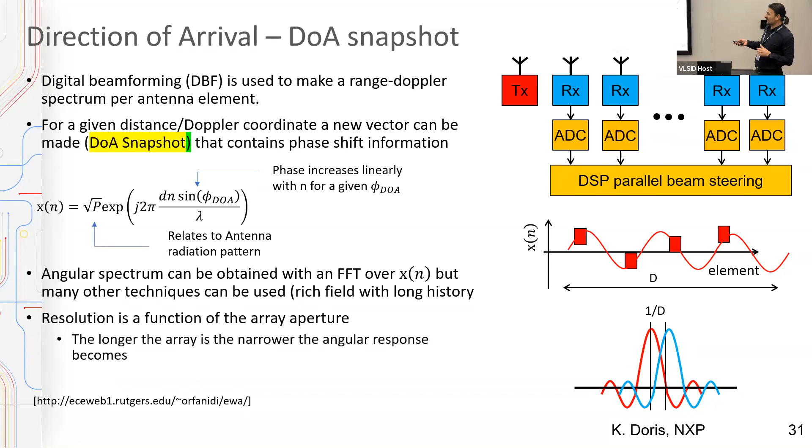The longer my array, the narrower the response. Again, it's Fourier analysis implemented now in the space domain. It's the same thing again. There is a bit more on that. There can be multiple different, let's call it algorithms, to do direction of arrival estimation. We stick to the basic: large array, you get the angular resolution you need. But large array means also large cost. It's very difficult to implement it.

So we will now go a step further and introduce the idea of a virtual array. So not a standard array, it's a virtual array. What is the idea about? Imagine I don't have just one transmitter and many receivers. I have one transmitter and a second and a third and a fourth, but they are offset. So now from this transmitter, I get 4 received signals with different distance from here, here, here, and here. But from the other transmitter, I get a different distance. So I can have a multiplication of the different paths by using more transmitters.

In that sense, you create a virtual array, which is a convolution in the spatial domain. So for this transmitter, you get these guys over here. From this one, you get these 4 guys over here, and so on and so forth. So that's a virtual array. What's the advantage of it? If you want to have 16 elements, with a standard approach, you need 16 receivers, 1 transmitter. With this approach, you need 4 transmitters, 4 receivers, so half the elements, 8 versus 16, and it really grows if you go further. There is a catch here.

First of all, of course, all those elements need to be close together so that it's coherent. You see the target with the same RCS. You don't see a different target if you go a bit on that side or a bit on the other side. It needs to be the same, right? So it needs to be small.

Second point is that you have to distinguish which transmitter signal you are getting. Is it from 1 or from 2? How do you do it? If you have an FMCW waveform, you send the same signal everywhere. How can you tell? So you need to put some functionality into the waveform to encode it. Okay, so that's a different thing you need to do. Now complexity starts building up. Okay, I need to distinguish. How can I distinguish?

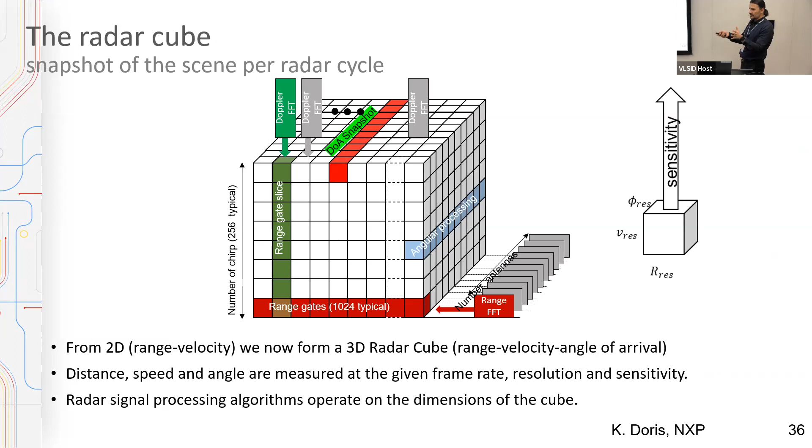And see this as a sort of a continuous refresh. So it's an ADC in a radar definition that you keep quantizing the field in multiple dimensions on a given rate.

So to summarize: range detection, you use time of flight. Angle of arrival, you use coherent MIMO in virtual arrays. Velocity detection, you use Doppler. And sensitivity, you practically need SNR for it.

And for each of these four, there are some primary relationships, proportionality with physical aspects like the time of my waveform or the wavelength. And there are some regulated type of dependencies. That is, yes, for range resolution I can increase the bandwidth to 10, 20, 30, 40 gigahertz to increase the resolution, fine, but I'm not allowed to because now they specify that the radar band is between 76 to 81. Deal with it. You cannot increase further.

So next to this sort of overall binding limitations, you have the trade-off between the four domains. If I want maximum range, I need a lot of power, longer pulses. I use pulse compression to decouple it from resolution. But then if I want to do velocity, I need shorter pulses. And I need long chirp sequences for resolution, but long chirp sequences get my system incoherent for MIMO. So there's always these cross-domain dependencies.

So we'll go to the next level now, to the perspective of the IC designer. Okay, so the IC designer typically doesn't understand all that, takes it as a given, gets some specs, says okay. But reality is that there is an interplay between IC design and system design. And now we have to understand a bit more about circuit implementation.

Let's go back. So this is the radar transceiver architecture. Remember, transmit, receive. We get our baseband signal, ADC. We do the windowing for FFTs, the 3 FFTs, and that's your target list.

And so on the waveform level, the radar designer needs to choose the type of waveform—long range, mid-range, or short range—depending on the bandwidth. Remember, for long range, there's no need for you to send 4 GHz pulses to get 4 centimeters resolution on a car at 150 meters. It doesn't make sense to spend all that power. So you would use maybe 250 megahertz so that you get something like 15, 30 centimeters.

That's good enough. And then use the margin you have to do MIMO, so that you split your band. So you can play out in a time-frequency domain. You segment the whole available time-frequency product you have, and you plan your waveforms.

On the IC architecture and antenna side, then you need to choose the right architectures. You go into the block level, the right topology for your PLLs, ADCs, and then in the end implement it in a given technology—22 nanometers, 28 nanometers, 40 nanometers, bipolar, silicon germanium, name it. It's up to you to choose what's best. But that has a consequence on what you implement here.

So a few years ago, around 2010, me and a few of my colleagues, we kind of said to our management team, and then went to some tier one and said, look guys, we can make RF CMOS for radar. And they were laughing at us, practically laughing at us, because it was unimaginable. You need high supply voltages, you need reliability, you need high output power.

How can you make that with CMOS technology? Well, yes, you cannot make it with CMOS technology if you do exactly the same thing. So you have to switch off your mind and turn it on again to do things in a completely different way with a different technology. You have to combine and use all the degrees of freedom. An application allows you to match technology to the waveforms.

So let's take an example. This is a benchmarking of FT max with ID, so current density.

And you see here the black part is the technology, silicon germanium. It's millimeter wave optimized technology in NXP. And you see it does have a higher FT than 40 and 28 nanometer CMOS. But you also see that it generates this at a much higher current density.

So now I can go back and say, you know what? I can use a 40 nanometer CMOS, and I can operate my devices at a much lower density. They're fast enough, not in peak power, in peak frequency as good, but they are fast enough, but they give me the advantage of low power. Low power means I can utilize that to reduce losses, so I don't need to generate all this output power.

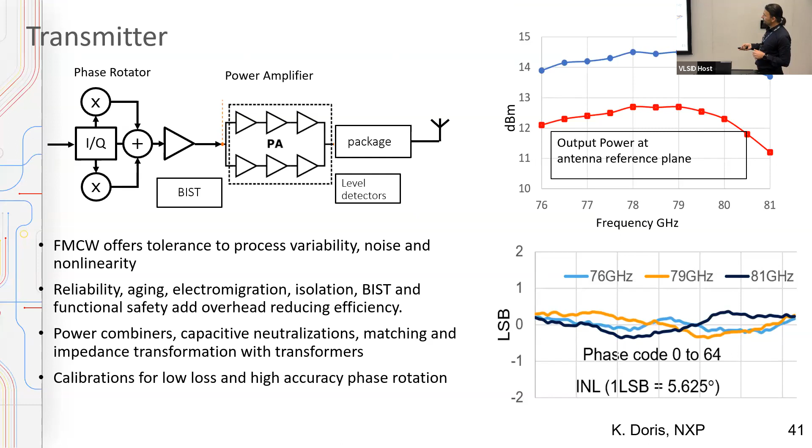Remember the distance in FMCW stretches with the pulse compression function. A target that is close by is usually the biggest - remember the R to the power 4 function. So if you have a truck at 5 meters and a bicycle at 10 meters, the bicycle is significantly smaller - that's a 30 dB difference. And with the 10 meters distance, you can calculate how many more dBs, like 30, 40 dB further. So a strong target nearby, you have to find a way to put it aside.

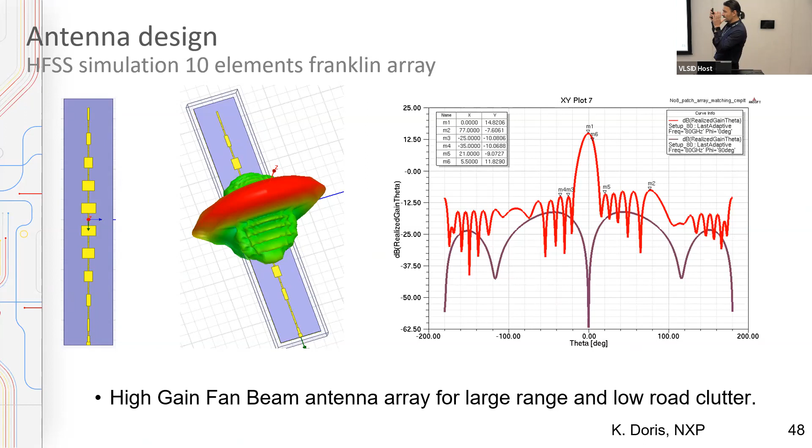Put that together, comes to a device like the Barracuda. Barracuda is a code name. We started from the first design with the dolphin. This is Barracuda, and then we keep using this type of big fish or sea animals to describe our products. This one is a second generation 40 nanometer RF CMOS transceiver. You saw it in the video. So 4 receive, 3 transmit, ISO 26262, ASIL level B, multiple digital interfaces, fast chirp, and 6-bit phase rotation. So all that in a MMIC chip.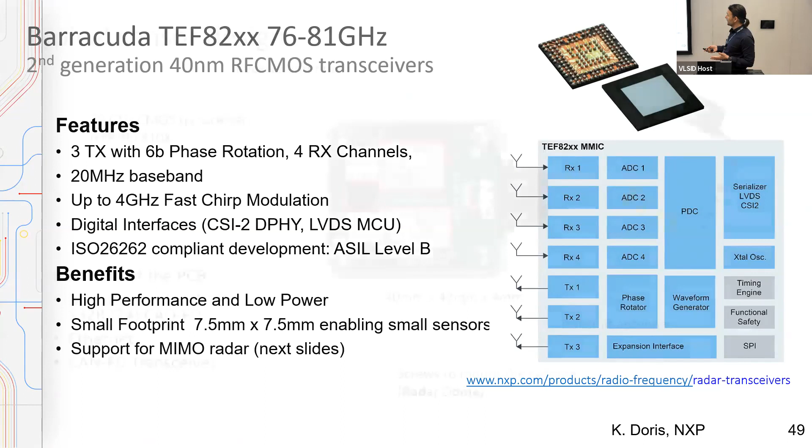But of course, the world doesn't end there. So what do you do with it? Let me show you a typical sensor design. Everything is put into a radome. Radome is a radar dome, where you put your radar and the antenna and everything. And this is important because it needs to be mechanically robust. It needs to have low attenuation. It needs to be dust-free. It needs to have the proper thermal capabilities.

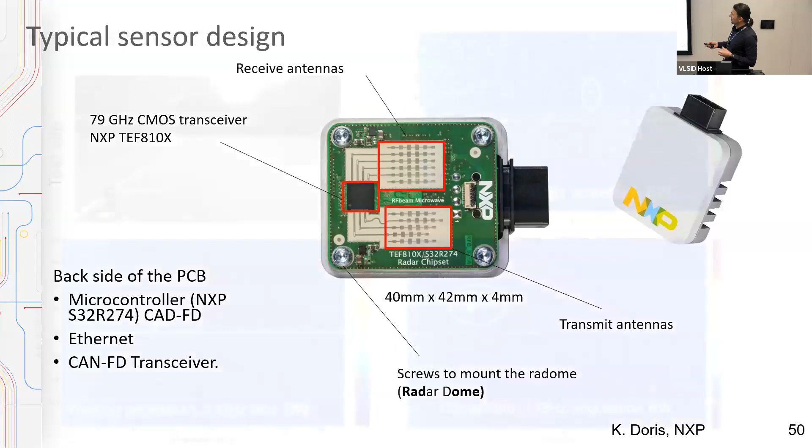So you see the chip here, 4 receive antennas, the patch antennas I showed you before, and the transmit antennas. That's the cover on the top, and behind it there is a microcontroller, Ethernet, and CAN FD. So that's a device. You would call it corner radar. It's a single device. So just an idea how it looks like. You have a device over here.

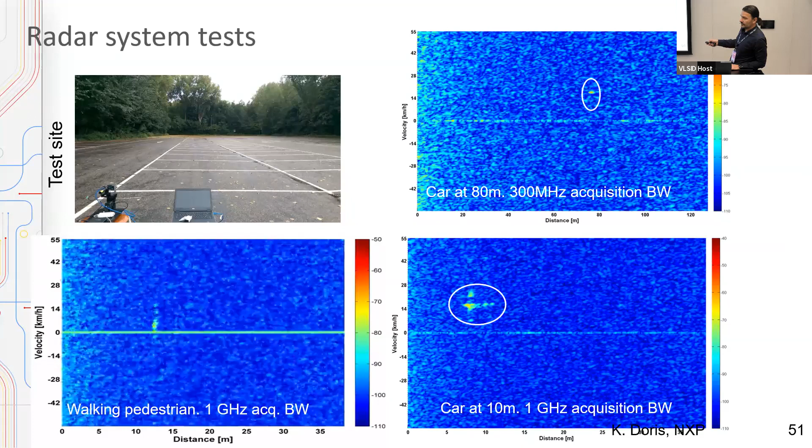Typical tests to show reliability and performance are also assuming the presence of the radar sensor in the car. Nobody wants to have this demo car. We showed you in the video, the imaging radar was on the top. That was a demonstrator, but practically it needs to be in the car. So it's behind the bumper, and that means attenuation.

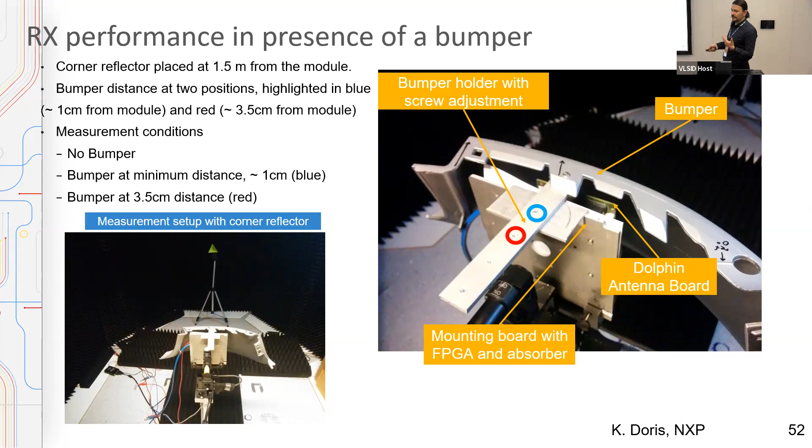So what we typically do here is we have this type of structure. This is the board. This is a bumper. This is an anechoic chamber. You move the distance from the sensor to the bumper to get a little bit of a feeling of the impact. And then you can see clearly that you have the bumper and multiple reflections of the bumper. So it's not only one.

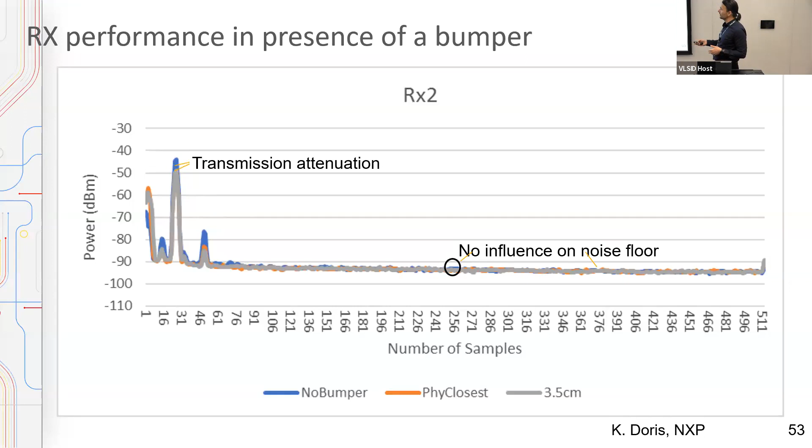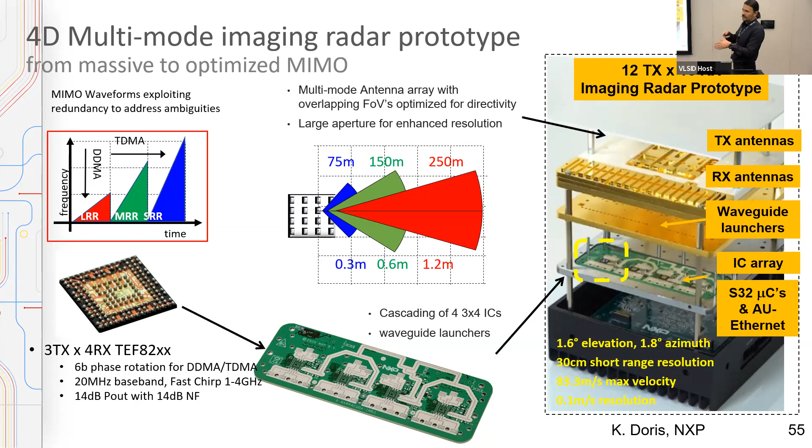Then you go into multimode radars. You start utilizing these chips. You see here a board with multiple chips and antennas. It is put in a radome, and then we have waveguide transitions. They go to different antennas, optimized transmitter, antenna array for long range, antenna array for mid range, and for short range. Different waveforms combined together, and of course, a complete DSP engine below to make an imaging radar like the one you saw in the beginning. Those things allow you to use multi-modes, wide field of view, scan, adapt, and so on.

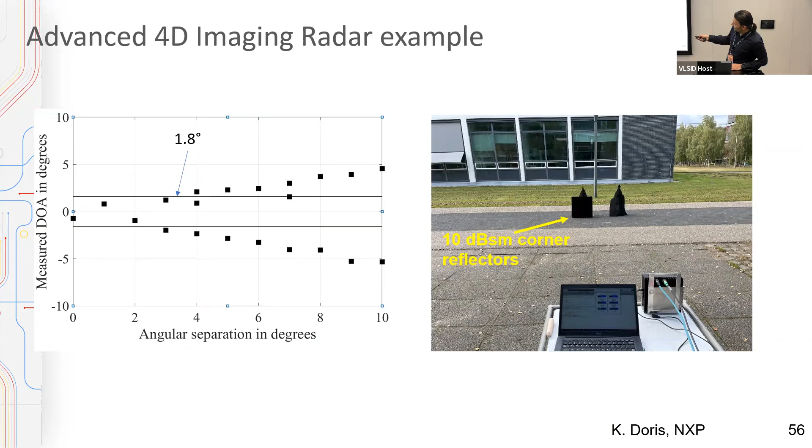So just an example now, here you see there are two reflectors at a given distance. This is the board. In this particular case, you have something like 1 degree of resolution, 1.8 in this case. From 1.8 further, you can really start clearly distinguishing the objects as you place them from far away to close. You actually see it saturates at 1.8. That's the type of resolution you get with these radars.

So what's next in this band? We're not there yet to fully exploit the band, so there are still things hopefully we can do. If you take this board and the imaging radar I told you about before, one can make several observations. There's a lot to do still on directivity, optimizing the antenna domain. And there is a man in the middle here costing a lot of power because this is a discrete waveguide transition. You go from the electrical domain of the PA to the electromagnetic domain of an antenna via a discrete waveguide. If you could actually put that into the chip, you would eliminate those losses, and that allows you to scale down your power dissipation further.

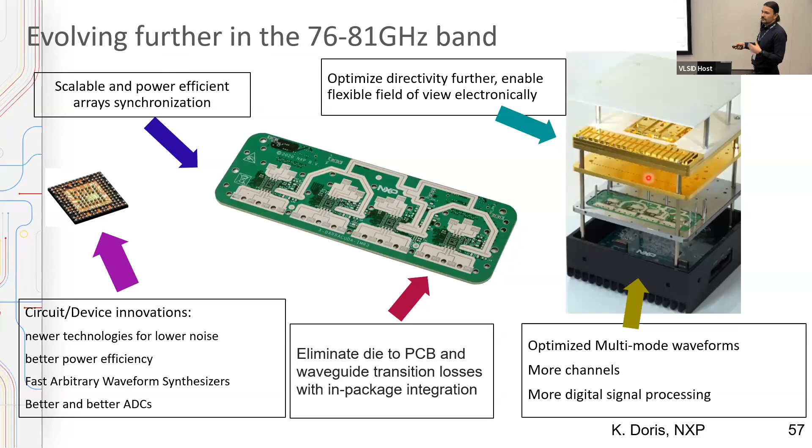Then another point is to synchronize. You see these long transmission lines, right? All those things you could actually find a way to simplify. The larger the cascaded radar, the bigger the problem. So you have to find a way to synchronize these radars in a cost-effective manner. New technologies to make power efficiency even better, wider bandwidth ADCs, better DSP, they're all welcome. You need to have even faster and arbitrary wave generators. And in the end, of course, you need more digital processing, a lot of smartness in the processor and in the algorithms.

Just an example, visual, this is an antenna in package. What we do here is the previous chip, but we put the antenna in the package. And this is used with an ADL concept, an artificial dielectric. We put many small patches, metallic patches, into the package, and with that we can make an array. And that's actually a typical corner radar you can make without the complexity of large antennas and cost and losses.

This is another example, a waveguide launcher. So that's the board I showed you before. And this is the transition where you go to the waveguide domain. You see here is the chip, the bumps. You go with a transmission line to a radiator, actually a waveguide radiator, to the antenna. You can replace all that directly from within the package, having this blue box. It's a special construction with metals you can radiate directly upwards into.

And all those are evolutionary steps, one of the many that help you keep expanding and using the potential of the 76 to 81 gigahertz band. And going back to what I said before, we have limitations. This is the potential that the band offers to us in terms of resolution. We cannot exploit all of that. We have a limit, defined either by safety, by physical sensor size or the wavelength, physical limitations, regulations. How close can you get to that limit? That's your smartness in detecting this and the technologies you use.

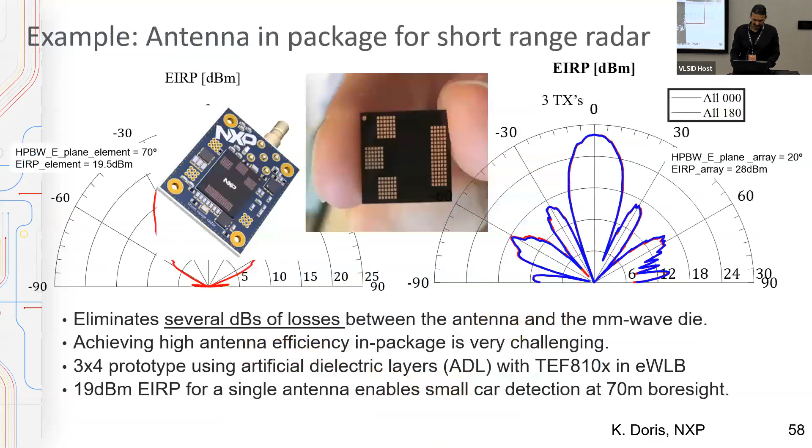The beauty of a PLL is it's a closed loop system, so it tunes out all the issues of process variability and non-linearity of the VCO. You need to have a very linear chirp, a very wide bandwidth. With a VCO, you have to put very advanced calibrations, pre-distortions, and deal with a lot of process variations. But the linearity of the VCO, you're talking about the sensitivity of voltage versus frequency? That's the linearity. But also the chirp needs to settle properly, within a guaranteed frequency offset, and that is what the PLL helps. It's a feedback system, so you benefit from the loop gain to get the linearity. Okay. Thank you.